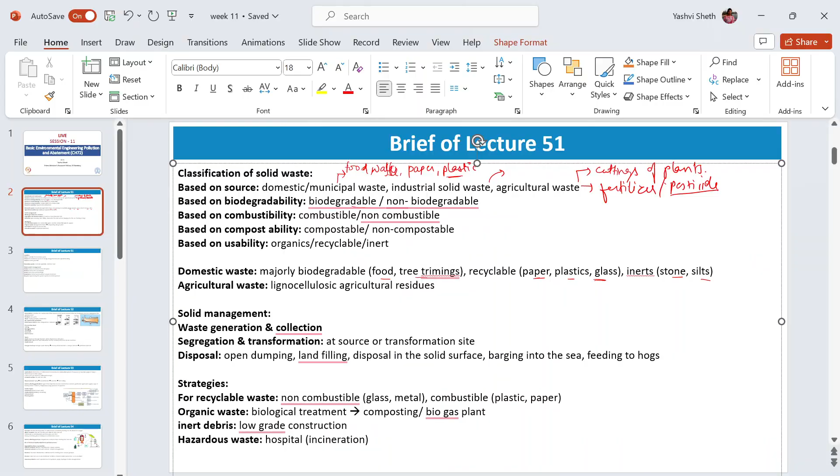Since agricultural waste has mainly agricultural residue, it will have mainly lignocellulosic compounds, which are the actual composition of any wood or something. So majorly you will have lignocellulosic compounds out of it.

Now, further, if we talk about how to manage this waste, once we know what all is present in it, like first step is to know what all is present, then we need to have some strategy how we are going to handle this. Okay, so first we have identified what are the waste generation sources, then obviously we do collection. So say for example, you are talking about domestic waste management, then you need to check for all

the possible generation sites. Say for example, if you are talking about your homes, then you just throw the waste into the dustbin, which is collected by municipality, and later it is treated or segregated or transformed or converted to some other forms. So first is generation and collection. So here you find out the source and you do collection.

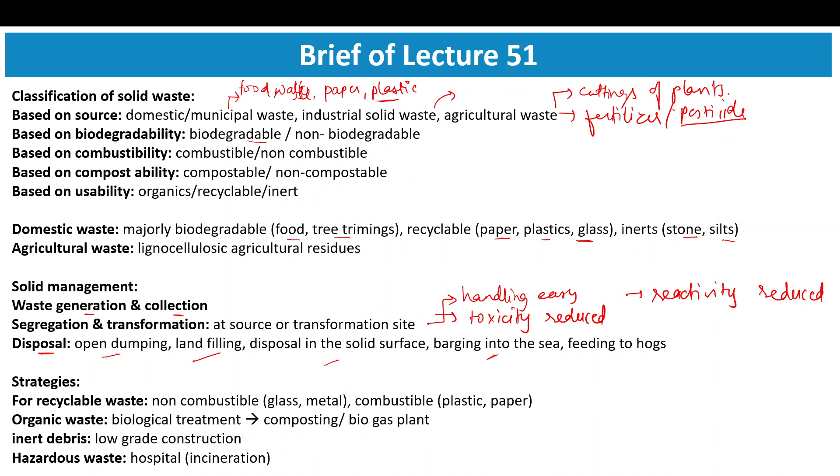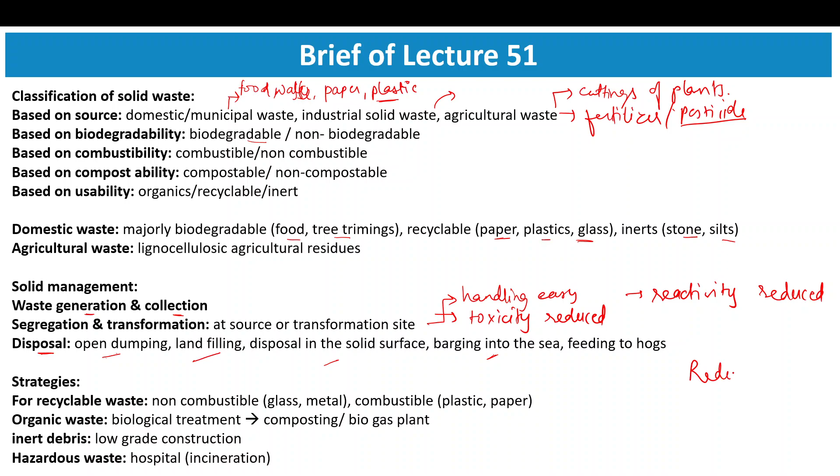Now, there can be different strategies that you adopt for different types of waste. For example, it is always said to follow reduce, reuse, and recycle, right? So out of all the waste, first you try to reduce, then you try to reuse and recycle. Out of the segregated waste, you see whether the waste is reusable or not, recyclable or not, whether it has some value addition. It can be further modified so that we can have reduced raw material consumption. So you may have different strategies to reuse and recycle the waste in the following forms.

For example, for recyclable waste, firstly, if it is non-combustible, for example glass and metal, then you can obviously separate out glass and recycle the glass. Otherwise, if it has some value addition, if it can provide heat or not, that also you can check.

Now, plastic is the one which is not degradable at all, or it takes years and years to degrade. So, what is advisable? It is to recycle, and maybe you do some transformation and recycle and reuse that waste.

Now, apart from this, there can be organic waste content in the solid waste which is available. So, for organic waste, obviously it is biodegradable. Then you provide a biological treatment to it by providing a microbial culture, and then you can have composting to synthesize fertilizers, or you can have a biogas plant to generate gases which can act as fuel.

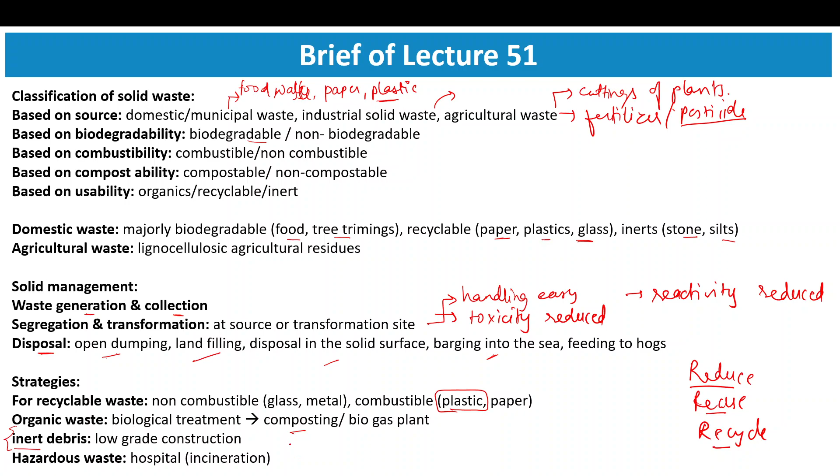Now, there can be another section of waste which will be inert, so you cannot derive some reactivity and you cannot convert it into some useful form, but you can use it in some low grade construction. So some sand or dust particles. So you can mix it with the cement, or for that you can have a low grade construction. And for hazardous waste, the end treatment is always to burn it because it is not recyclable or reusable.

Now moving forward, at the end, what we do with the leftover solid, we dump it into the landfill site. As I said, landfill is the most common and suitable option for dumping. So in that case, there are also different types of landfills. So first is class one landfill, which is where you just dump hazardous waste, right? So this also highlights the importance of segregation, right?

Because if you would not segregate, then there are chances that at the end, when you dump all the solids, hazardous and non-hazardous will also mix, and you can also have fertile land converted into barren land and so on. Such impacts can be observed, right? So in that case, first there will be different dumping of hazardous waste. Then there can be different dumping of waste that is not too hazardous but requires some special handling. And last is which is very less hazardous and does not require much attention, for example, sanitary landfills.

And here, by hazardous waste, you mean that they can be corrosive, they can be ignitable, they can be reactive and toxic. And also, for this hazardous waste, you are not able to further reduce this toxicity for some reason. And there is no other option left other than dumping. So that is how you manage.

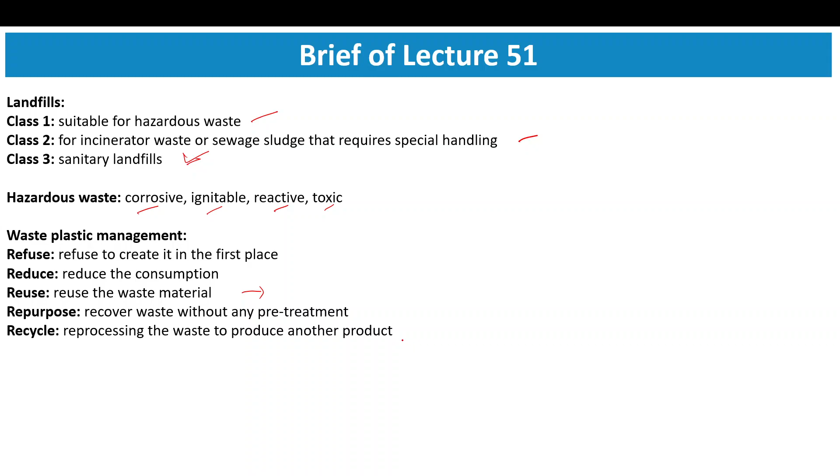Now, moving forward, as I said, we need to have some sort of transformation given to the solid waste so that its handling is easy, its toxicity is reduced, and also its reactivity is reduced. So to achieve all that, we do some transformation of different types of solid depending on the application and depending on its composition.

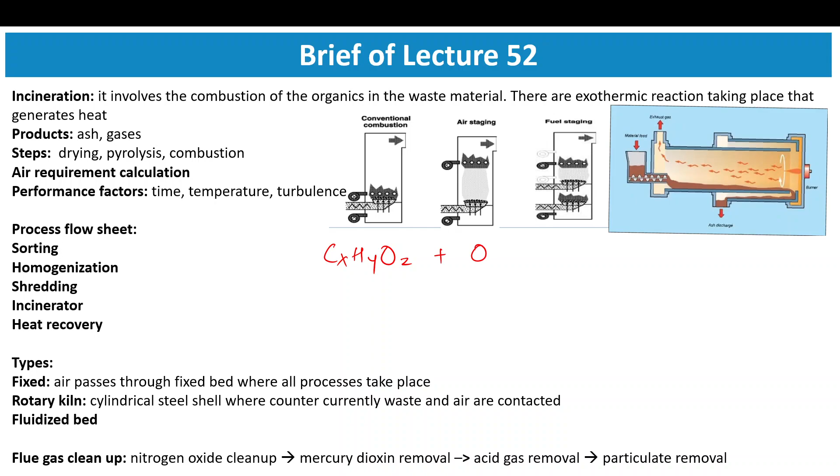So the first type of transformation that we can provide to any solid is incineration, which is the combustion of the organics present in the waste material. Now, in incineration, we supply air, and the supply of air is always much higher as compared to the stoichiometric requirement. Say, for example, there is CxHyOz, and there can be some sulfur, nitrogen also. For that, you require n molecules of oxygen to form CO2 and H2O.

Now, for complete combustion, this is the theoretical amount of oxygen requirement. But practically, theoretically we require n molecules, but it is not possible to provide just n molecules and have 100% conversion of this.

There can be n side reactions occurring and so on. So it is always advisable to provide one material in excess, which here is oxygen. So for complete combustion, we provide much excess of oxygen in the form of air, right? In the form of air, we provide 5 to 50% depending on the type of waste. We provide 5 to 50% of excess air to ensure complete combustion.

Now, as you see, the combustion process is exothermic in nature. So here you just need to preheat or start the reaction. After a certain time, it itself generates heat so that the process is self-sustaining. Now here, after the incineration occurs, the end products are just ash and gases in the form of carbon dioxide, monoxide, water vapor, SOx, NOx, right? So these are the vapors or gases that you get from incineration.

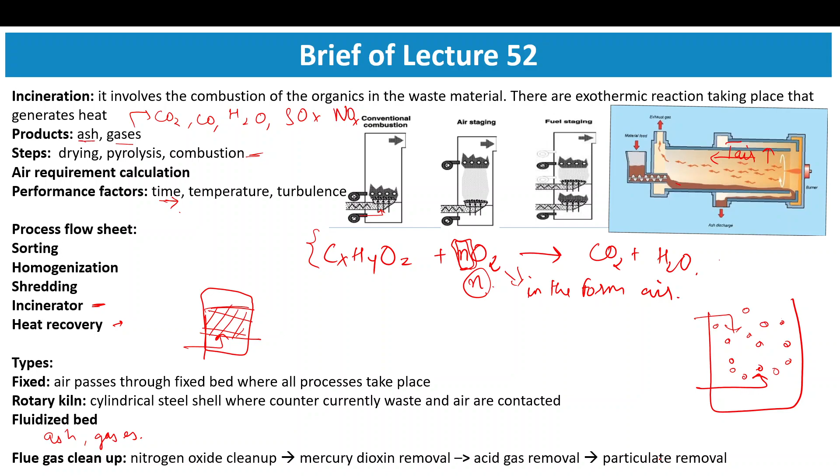Now, another strategy for the treatment or transformation of solids is gasification. As compared to incineration, as I said, there is some theoretical requirement of oxygen for complete combustion. So in incineration, you supply excess air, but in gasification, you supply air which is lesser than the theoretical requirement.

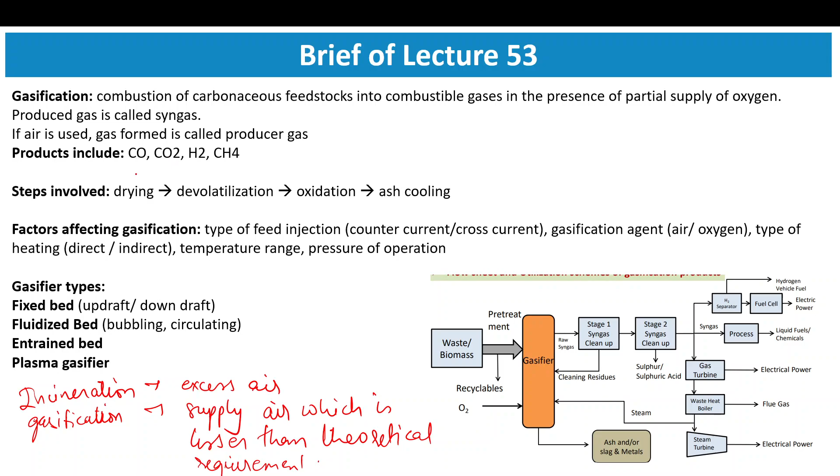So since you have a limited supply of oxygen here, the end products are majorly CO and H2. There will be a series of reactions. I'm not going into detail, but at the end of those reactions, you will have majorly CO, H2, there can be CH4, there can be CO2. By gasification, you generate majorly a CO plus H2 product, which is known as syngas, and from this you can separate H2, which can be used as fuel in various applications. So H2 is the fuel, and by this process you generate fuel or a value added product.

Syngas is produced when you use oxygen as the supply, while if you use air for the combustion, producer gas will be produced, which will have a much larger quantity of nitrogen. So these are the products that can be obtained. Now, the steps involved in the gasification process: firstly, it will undergo drying for the removal of moisture. Then you preheat the solid, and as the temperature rises, the volatile organics will evaporate and get volatilized. Later the oxidation of the solid occurs, and then you provide cooling of the ash. So these are the steps involved.

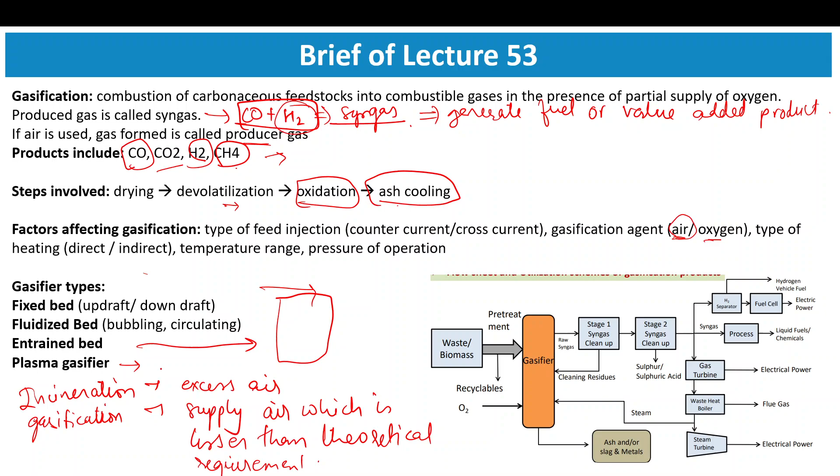So these are the types of gasifiers used. Now moving forward, another type of transformation is pyrolysis. Pyrolysis is nothing but when you do not supply any oxygen at all. So moving from incineration to gasification to pyrolysis, the oxygen supply to the material is reduced. In incineration you provide excess air, in gasification you provide limited or less than theoretical value, and in pyrolysis you do not provide any at all.

So here, since it is in the absence of oxygen, the major products obtained are char, bio oil, H2O, and gases like CO, CO2, CH4, and H2. There are different phases of pyrolysis. The instant or primary phase decomposition generates gases and char, whereas the secondary phase involves cracking and condensation.

If you look into the process, you supply nitrogen to the pyrolysis chamber. It's a closed chamber where nitrogen is supplied to maintain an inert atmosphere, so there is no contact with oxygen. Pyrolysis occurs in this chamber, the gases come out, and heat is recovered from them. Liquid is also formed, in the form of bio oil.

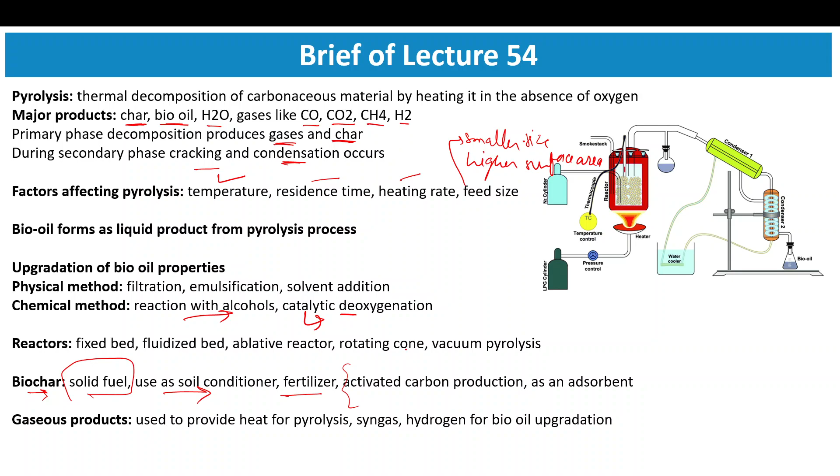Talking about different types of pyrolysis reactors - fixed bed and fluidized bed are the most common ones, and others are less used. Next, the solid obtained from pyrolysis is known as biochar. It can be used as solid fuel, for soil conditioning, and as fertilizer. Since biochar contains a lot of carbon, you can produce activated carbon from it, through chemical treatment or physical modification of the biochar, or you can use it as an adsorbent.

Gaseous products usually involve high heat content. They also contain syngas and hydrogen. Hydrogen can be used for deoxygenation, or catalytic hydrogenation of bio-oil to upgrade its properties. So whatever you generate in the gaseous product, you utilize it in some form - for example, if you have gas with high heat content, you can preheat or provide heat to the pyrolysis reactor. So this is all about the lectures that have been covered.

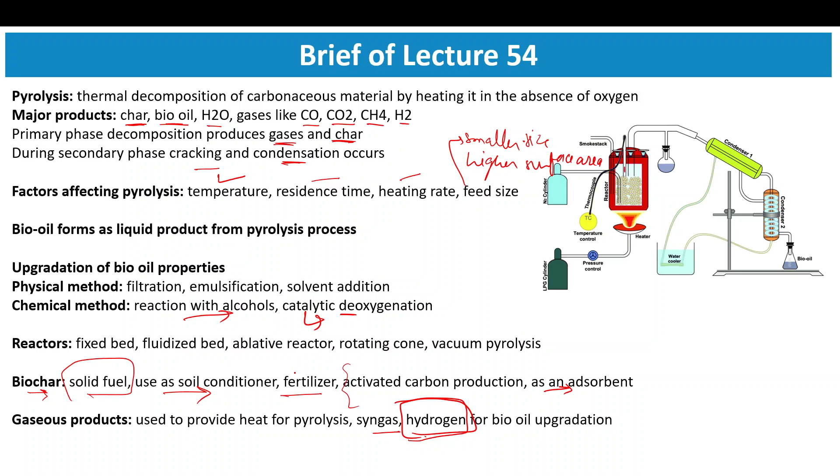Next is... is everyone following me, right?

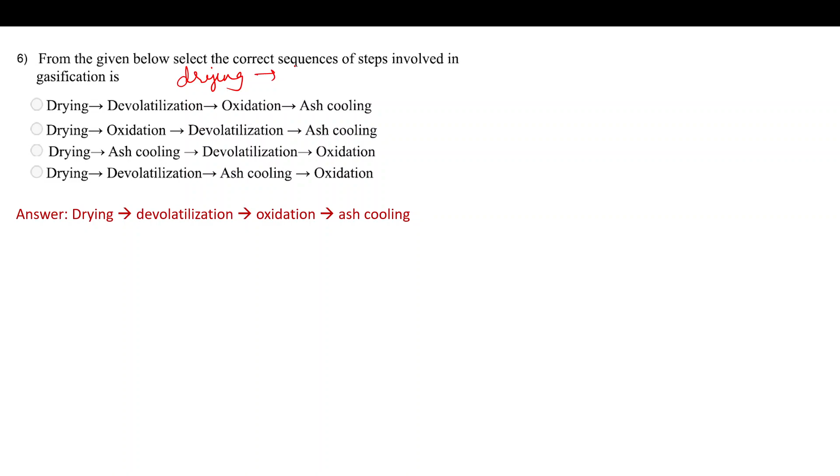Next, select the correct sequence of steps involved in the gasification process. Gasification usually follows these steps: first drying of solid, then devolatilization, then oxidation of solid occurs, and last is ash cooling. So this order is the first option, and A is the correct answer here.

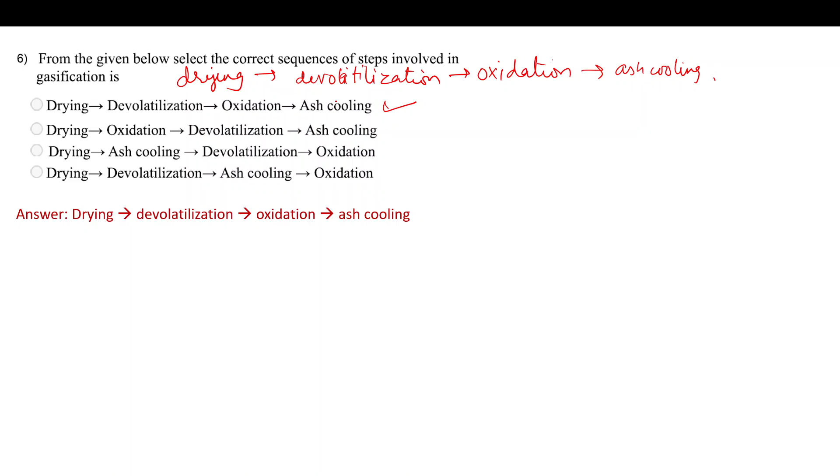Next is a numerical question. A country discards roughly 150 million tons of municipal solid waste. The heating value of those discards is about 6,500 BTU per LB, and the mass burn waste-to-energy facility can convert that waste to electricity with a heat rate of 16,000 BTU of thermal input per kilowatt hour of electrical output, which means roughly 25% efficiency. Now estimate the electrical energy that could be produced per year if all discards were used in this type of WTE system.

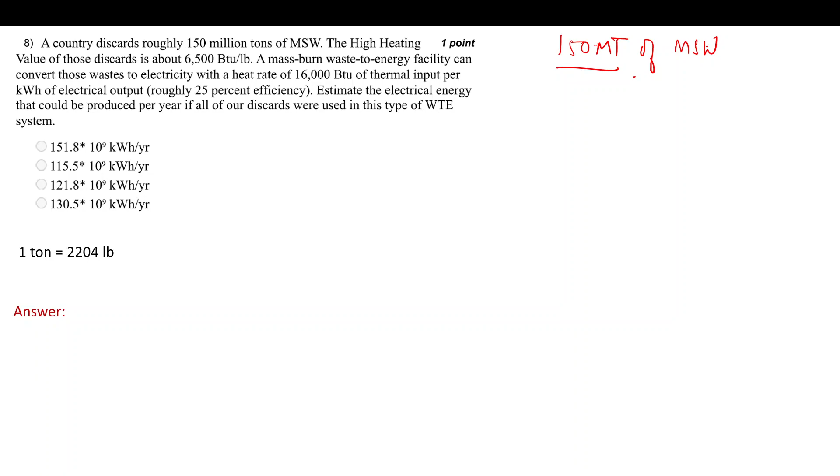So what it's saying is there is generation of 150 million tons of municipal solid waste - this is the quantity of waste generated. Now it's given that the heating value of this solid waste is 6,500 BTU per LB, which means for 1 LB of solid, you generate 6,500 BTU of heat. So for 150 million tons of municipal solid waste, we need to check the amount of heat generated.

Heat generated is nothing but weight of solid generated into its heating value. Here you're given the weight of solid generated in million tons - 150 million is 150 times 10 to the power 6 tons. A ton has the unit of 1000 kg, but the unit of weight used in the heating value is pounds (LB). So you need to convert tons into LB, and that conversion is given as 1 ton equals 2204 LB.

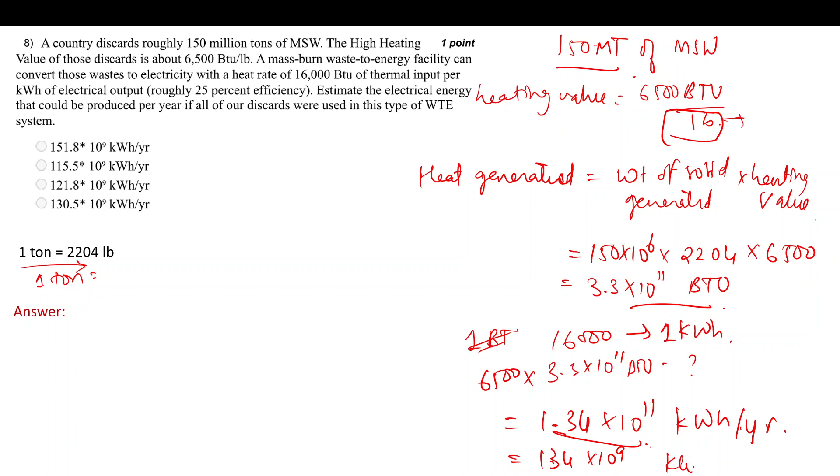And the answer given in the question is 121.8, like the correct answer mentioned, but there is no option matching here. So you can follow this procedure and do the calculation. The answer is not matching exactly with the option.

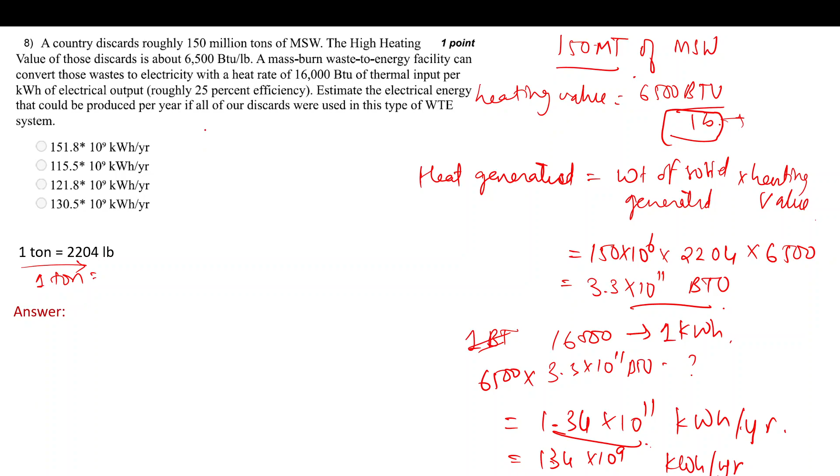Next question: estimate the landfill area needed to handle 1 year's municipal solid waste for a town of 250,000 people. Assume per capita national average discard is 8 lbs per day, no combustion, a landfill density of 1200 lb per yard cube, and one 10-foot lift per year. Assume 20% of the cell is soil used to cover.

So here what you are given is a population of 250,000 people, with per capita national discard of 8 pounds per day generated. So the total waste generated per day is nothing but per capita waste into total number of people: 8 into 250,000, which gives you 2 into 10 to the power 6 pounds. Mention the unit every time.